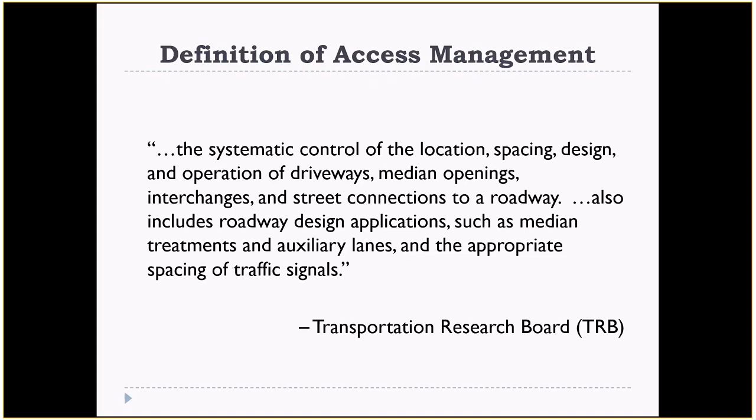We've learned a lot since the 2003 edition, with lots of experience from all over the nation. So in 2014, with a whole bunch of new research and input from different agencies, they've redefined access management as the coordinated planning, regulation, and design of access between roadways and land development. It goes on to say that it encompasses a range of methods that promote the efficient and safe movement of people and goods by reducing conflicts on the roadway system and at its interface with other modes of travel. These methods include improvements to benefit transit, pedestrians, and bicyclists, as well as different treatments for urban, suburban, and rural settings. So it's more all-encompassing than the first edition.

So it's very all-inclusive here when we are designing driveways and roadways. We now take into more consideration all road users.

So here's some examples of access management techniques. They talk about traffic signals that support signal coordination and efficient traffic progression. We're not using the traffic signals of our grandfathers, right? Traffic signals are just like the computers from 20 years ago. They can do a lot more and move traffic more efficiently. So we need to take advantage of that on our urban major arterials.

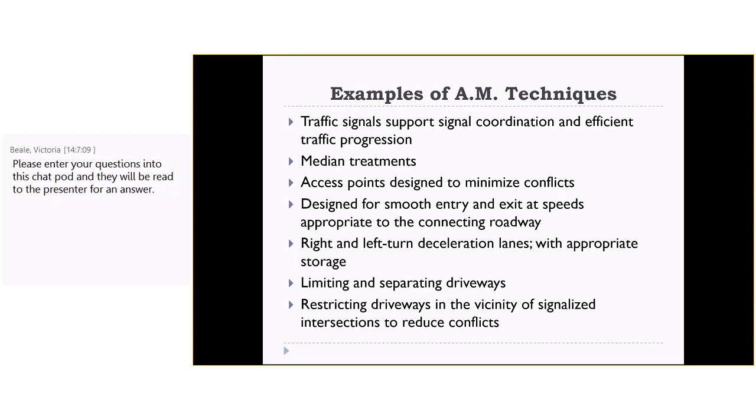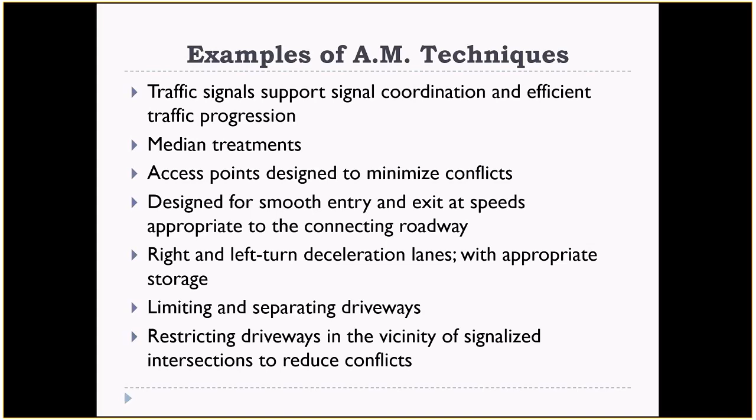We'll definitely be talking about median treatments to limit the movements allowed for driveways. We'll also talk about access points designed to minimize conflicts, designed for smooth entry and exit at speeds appropriate to the connecting roadway. And we'll talk about right and left turn deceleration lanes with appropriate storage lengths, and how we need to limit, separate, and restrict driveways in the vicinity of signalized intersections to reduce conflicts.

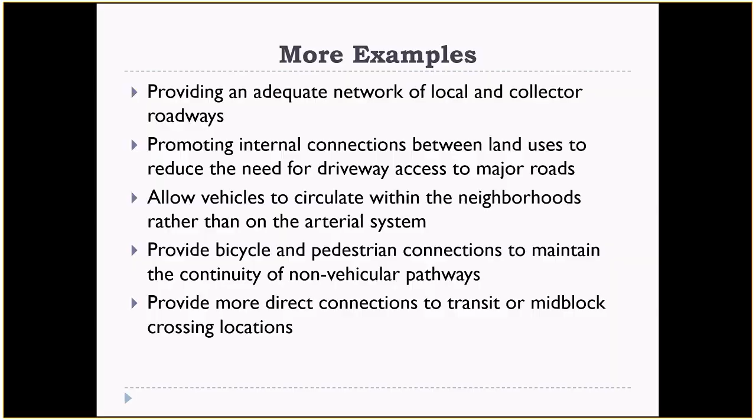Some more examples are shown here. Provide an adequate network of local and collector roadways. These roadways promote internal connections between land uses to reduce the need for driveway access to major roads, and allow vehicles to circulate within neighborhoods rather than on the arterial system. And we need to provide bicycle and pedestrian connections to maintain the continuity of non-vehicular pathways and to provide more direct connections to transit or mid-block crossing locations.

So those are some definitions and examples from the new, or second, edition of the Access Management Manual. So when you hear the definition of access management, it also brings about these questions to mind: What is the purpose of access management? Why is it important? Who benefits from it? And what happens if we don't manage our access?

So first of all, what is the purpose of access management? The main purpose is to provide vehicular access to land development in a manner that preserves the safety and efficiency of the transportation system. It applies traffic engineering principles to the location, design, and operation of access drives serving activities along the roadway, and evaluates the suitability of providing access to a given road, as well as the suitability of a site for land development.

And it addresses the basic questions of when and where access should be located, how it should be designed, and the procedures needed to administer your program. So in a broad context, access management is a resource management tool, since it is a way to anticipate and prevent safety problems and congestion. And of course, it's hard to have an access management class without these two drawings.

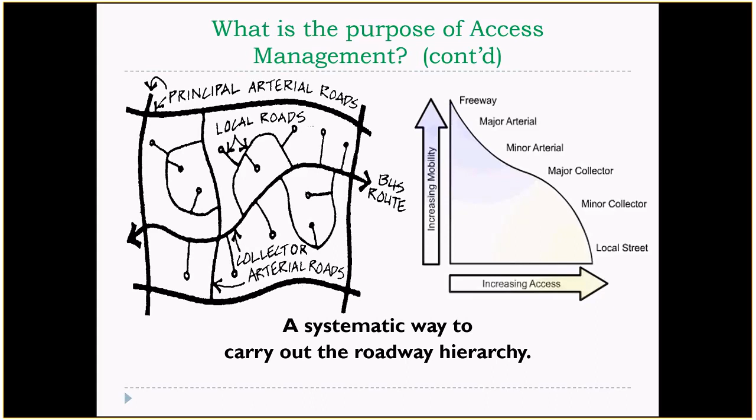So it's showing how access management is a systematic way to carry out your roadway hierarchy. From a planning perspective, access management is a systematic way to carry out the roadway functional hierarchy that is implicit in state, regional, and local transportation plans. So it's stressing the need for each jurisdiction to have their own thoroughfare plan. That's one of your basic tools to begin your access management program. Your thoroughfare plan classifies your roadways by function on the basis of the priority given to land access versus through traffic movements. So access management is particularly important along arterial roadways and other primary roads that are expected to provide safe and efficient movement of traffic, as well as access to property.

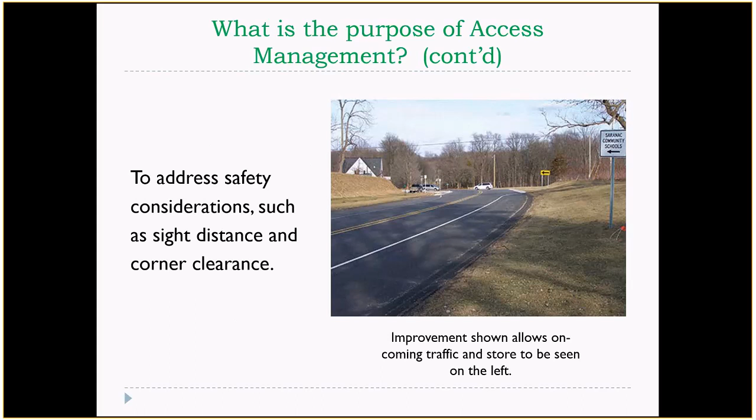Another purpose of access management is to address safety considerations. Here's a picture showing a location that used to have a sight distance issue with corner clearance, so they actually improved that roadway to take care of those concerns.

So why is access management so important? Well, without it, roadway function deteriorates more rapidly through closely spaced curb cuts and median openings, lack of turn lanes - as you see in that top picture - driveways near major intersections, and poorly coordinated traffic signals.

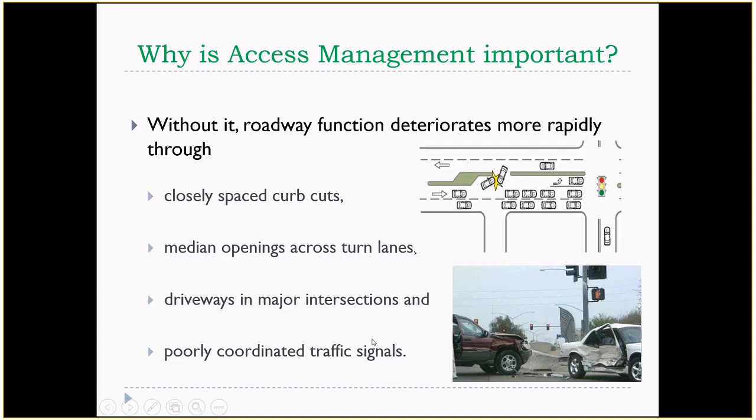Our roadways are an important public resource, and they are costly to build, improve, or replace. In our revenue-constrained environment, effective management of the transportation system is not an option - it is essential. It is simply not practical to allow major arterial roadways to deteriorate under the assumption that they will be replaced or reconstructed in the future. Yet many areas continue to do just that, by allowing closely spaced curb cuts and the other items shown there, thus creating unsafe and congested conditions on major roadways.

So government agencies can provide many benefits by managing the roadways with proper access management.

So here's a list of things that access management can provide. It can extend the functional service life of roads and highways, increase public safety, reduce traffic congestion, and improve the appearance and quality of the built environment.

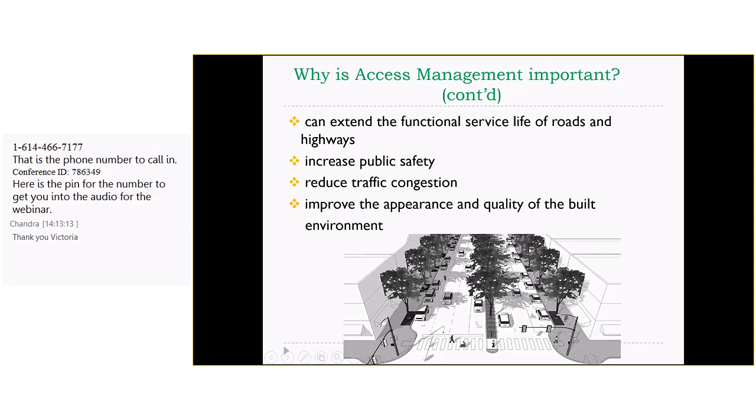Here we have a picture showing a nice, appealing urban central business district street with a few access management provisions included. It has a safe, clearly defined crosswalk for pedestrians, bicycle lanes, a tree-lined median to restrict left-turn movements, and pedestrian refuge for a mid-block crossing and a signalized intersection. You'll also notice there are no driveways.

Some other benefits: we preserve long-term property values and the economic viability of abutting development, improve fuel efficiency, and reduce vehicular emissions. We also consolidate access roads, which is less damaging to rural landscapes or environmentally sensitive areas than numerous individual private drives.

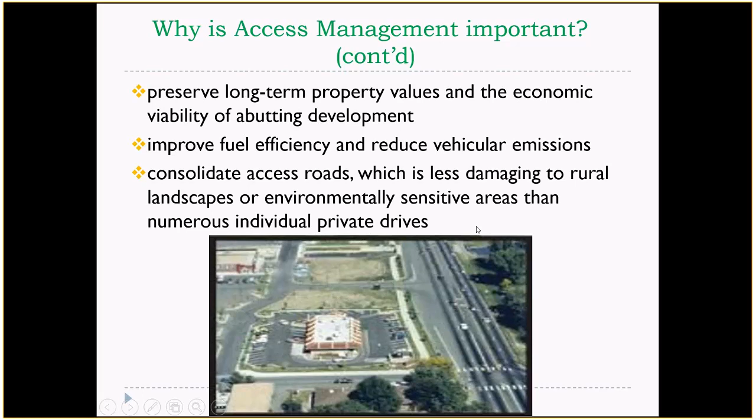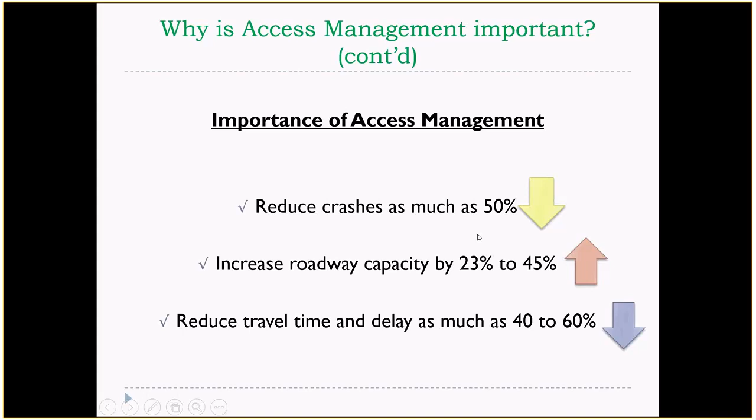The importance of access management: number one, an effective access management program can reduce crashes by as much as 50%, increase roadway capacity by 23% up to 45%, and reduce travel time and delay by as much as 40 to 60%.

So who benefits from access management? Well, all roadway users benefit. Motorists face fewer decision points and traffic conflicts, which simplifies the driving task and increases driver safety, with fewer traffic delays, and they arrive more quickly at their destinations.

Cyclists face fewer decision points and conflicts with traffic, which simplifies the cycling task and increases safety for cyclists, and they benefit from more predictable motorist travel patterns.

Pedestrians and transit riders benefit as well, because pedestrians face fewer and less frequent access points where motorists enter and exit the roadway, making it safer to walk along roadways. They can use medians as a refuge when crossing several lanes of traffic. Transit riders experience reduced delay and reduced travel times, benefit from a safer walking environment, and experience more convenient access to transit stops as connectivity of streets, sidewalks, and pedestrian ways are improved.

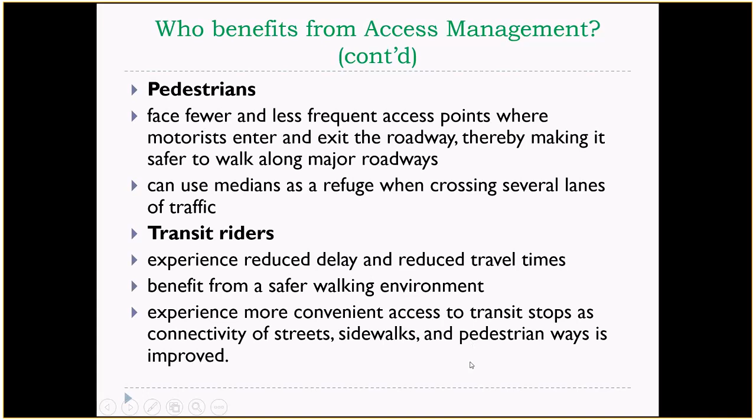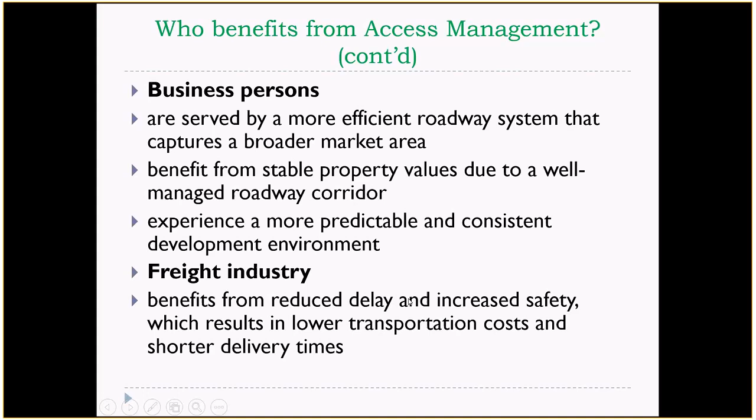Business people and the freight industry also benefit from access management. Business persons are served by a more efficient roadway system to capture a broader market area, benefit from stable property values due to a well-managed roadway corridor, and experience a more predictable and consistent development environment. The freight industry benefits from reduced delay and increased safety, resulting in lower transportation costs and shorter delivery times.

Government agencies and communities also benefit from access management. Government agencies benefit from a lower cost of delivering an efficient and safe transportation system, benefit from improved internal and intergovernmental coordination, and are more effective in accomplishing their transportation objectives.

Communities receive a safer transportation system, benefit from less need for roadway widening, which causes displacement of businesses and homes, and benefit from more attractive roadway corridors. They help protect and preserve their investment in transportation facilities, and may even reduce capital improvement costs for new or reconstructed roadways.

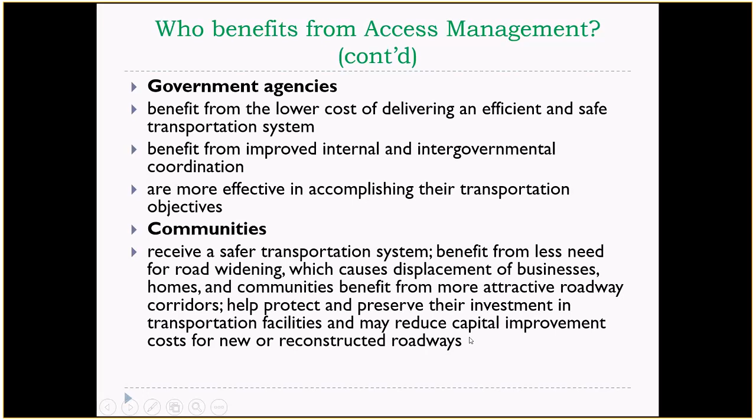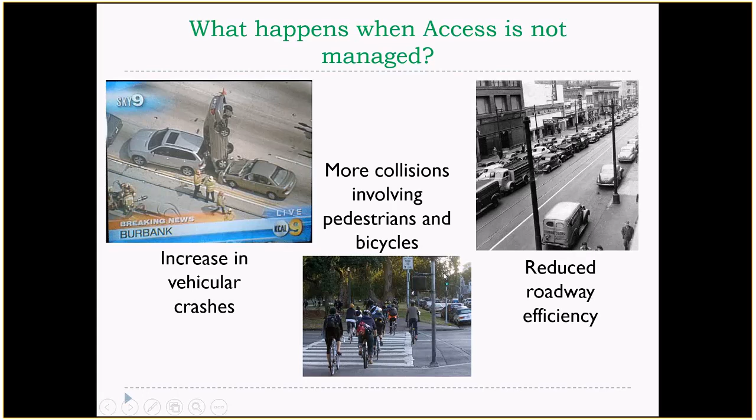So what happens if we do not manage our access? As you can see in these pictures, you get an increase in vehicular crashes, more collisions involving pedestrians and bicycles, and reduced roadway efficiency.

We might have unsightly commercial strip development, where each little development has its own direct access to the major arterial, with a lot of signage, making it unsightly. We also experience a degradation of scenic landscapes.

With major corridors becoming more congested, that generates more cut-through traffic in residential areas. Over time, these closely spaced and poorly designed driveways make it more difficult for customers to enter and exit businesses safely, and access to corner businesses may be blocked by queuing traffic.

Newer businesses seek out locations that are more attractive and have fewer access and congestion problems. Customers begin to patronize businesses with safer, more convenient access, and avoid businesses in areas of poor access design. Gradually, the older developed areas begin to deteriorate because of access and aesthetic problems, and investment moves to newer, better managed corridors.

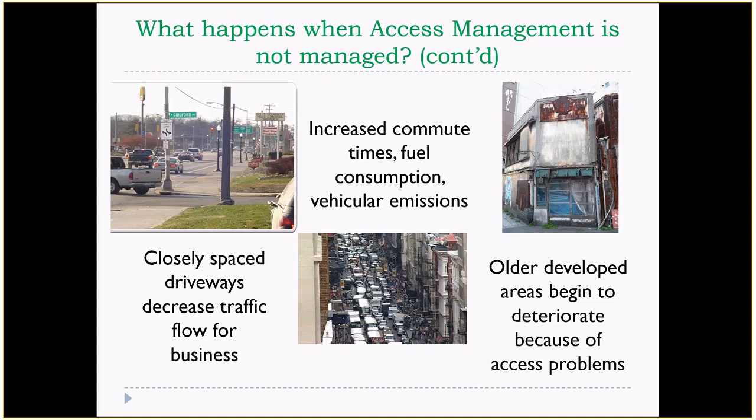Gradually, the older developed areas deteriorate because of access and aesthetic problems, and investment moves to newer, better managed corridors. These problems are symptoms of inadequate coordination of transportation and land use decisions. The resulting chain of events is a cycle of functional obsolescence along our major roadway corridors, which is what we call the transportation and land use cycle.

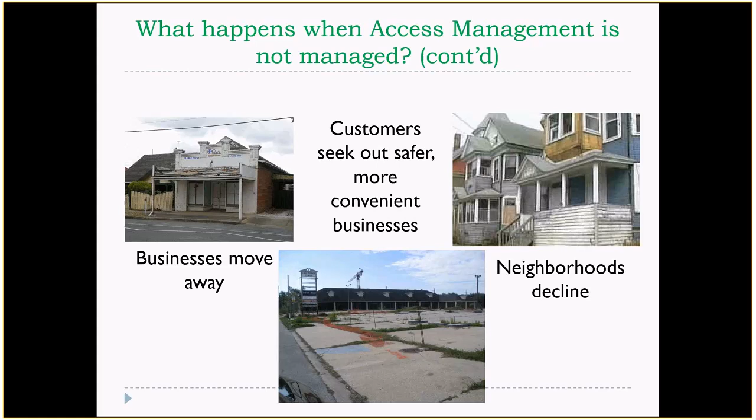So the transportation land use cycle, that is what we're trying to put an end to. With access management, that is our biggest weapon against this transportation land use cycle. So let's talk about this cycle. But first, we'll talk about the 4 keys to good transportation.

Take a look at this drawing. It shows a piece of ground that would not have any access until the new road is built, and that is how you would get access to that property. So we define access as the ability to obtain ingress and egress between a parcel of land and the highway system. Basically, how to get to and from your property via a public road.

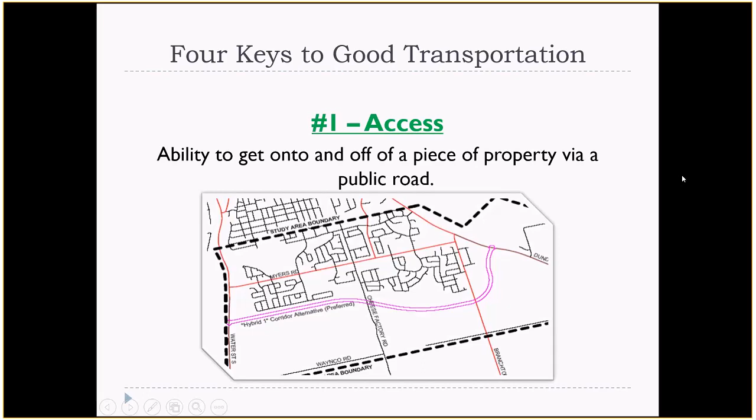And then we have accessibility. Accessibility is an area-wide measure of the ease of travel between locations within a defined area, such as a city, state, or region of the country. It is the ability to reach a given location from numerous other locations or areas. The accessibility to potential customers is of great interest to a retail establishment. Accessibility is also the ability to reach a variety of other locations from a given location. Accessibility can be quantitatively defined and measured.

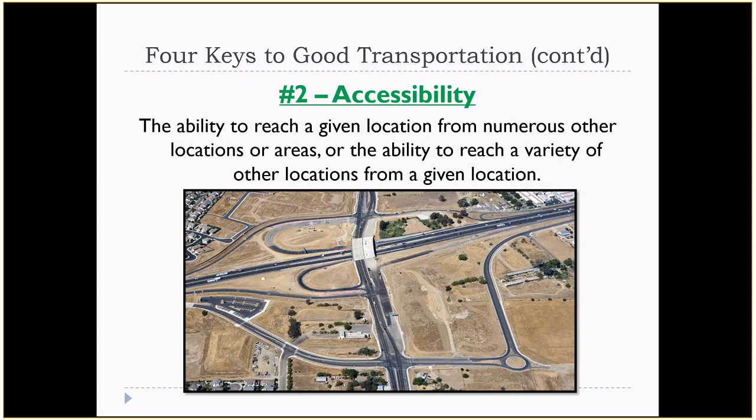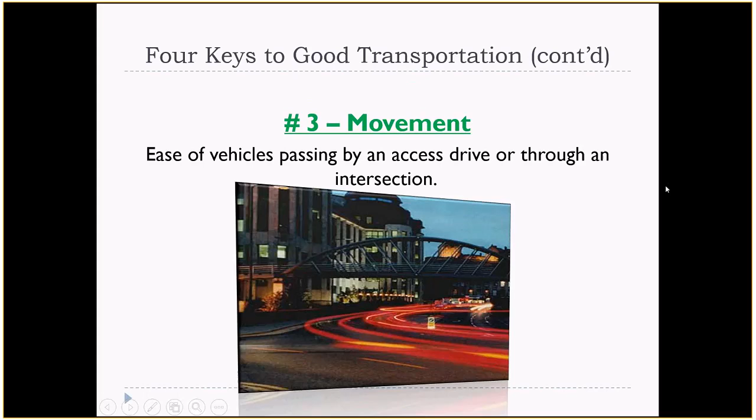Our next key to good transportation is movement. Movement is the ability to traverse a segment of highway. As used in access management, it concerns the degree of ease or difficulty of vehicles passing by an access drive or through an intersection.

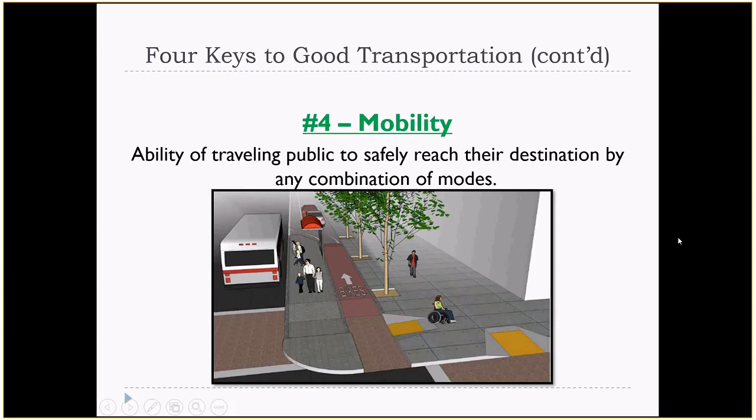And finally, our last key is mobility. Mobility relates to the ability of persons to make trips to satisfy their needs and desires by walking, or by auto, transit, bicycle, or any other combination of modes.

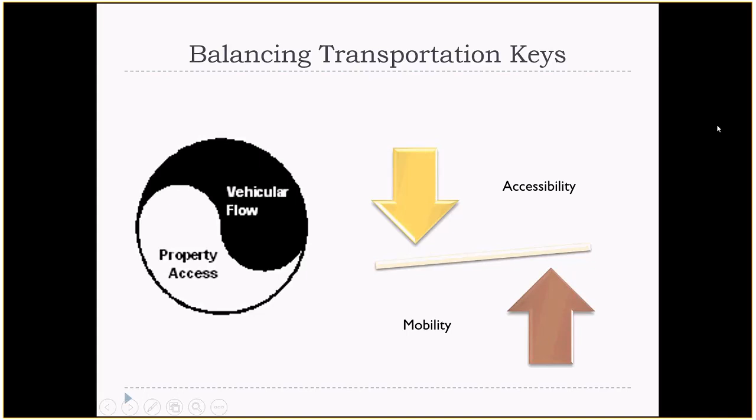With access management for roadways that carry a lot of traffic, and that are also supposed to provide access to private properties, we need a good balance between accessibility and mobility, and vehicular flow and property access.

Here's some keys to balancing transportation. First, it's important to note that an individual parcel of land or business can have good access but poor accessibility, poor access but good accessibility, good access and good accessibility, or poor access and poor accessibility. All highways or roadways provide both movement and access.

However, the two are in conflict. A high level of access results in poor movement, and high quality of movement cannot be obtained with a high level of access. Therefore, the degree to which both access and movement is provided on a given highway must be carefully managed so as to obtain the desired highway service and maintain traffic safety.

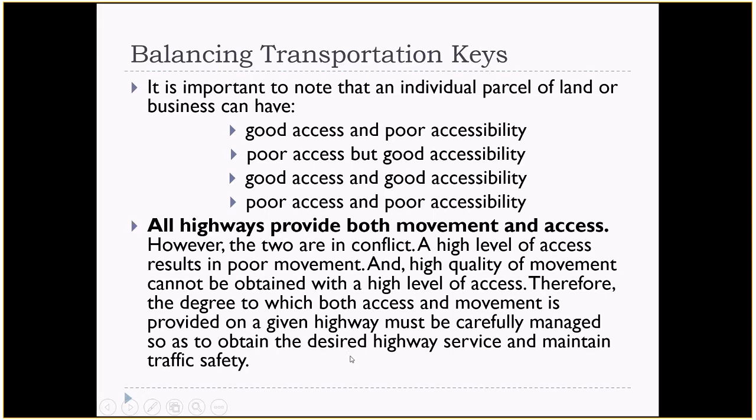So without good land use planning and access management, then we have a deterioration in the quality of traffic movement and also a deterioration of traffic safety.

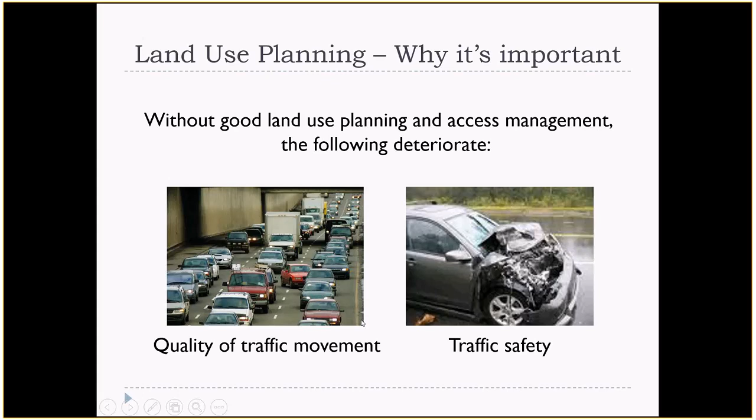And in the absence of good land use planning and access management, traffic safety and the quality of traffic movement deteriorates. And then the need to decrease vehicular crashes and restore capacity requires improvements to the roadway system.

Reconstruction to increase the level of service of an existing arterial is generally very costly and disruptive to both the public and the abutting businesses. Furthermore, the improvement in the level of service is often temporary because the improved service stimulates increased business activity.

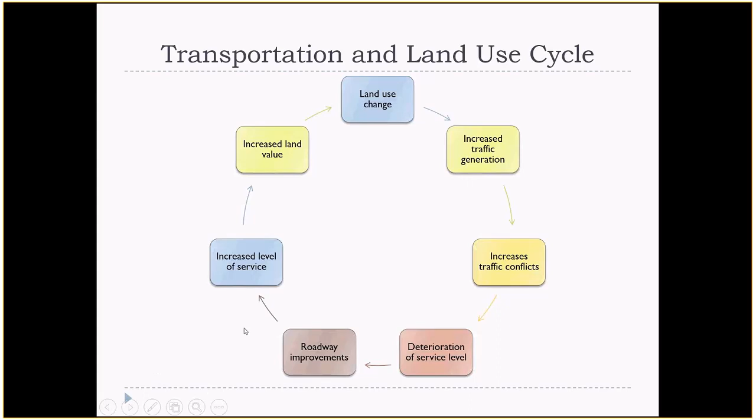In the more severe cases, the arterial must be relocated due to functional obsolescence, and the process starts all over again on a new location. So that's what we're trying to avoid with our access management tools.

Okay, so let's move on. There's some conflicts that arise that we'll jump into here real quick.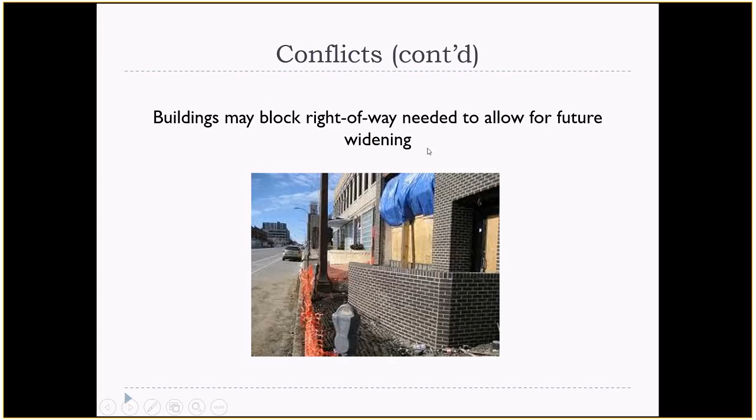But sometimes you have buildings that can block the right-of-way needed to allow for future widening. Let's take for instance Fifth Avenue in Columbus. We call that a major arterial. However, we actually call it a 4-2D arterial, meaning divided, but there are certain sections of Fifth Avenue that we can never widen enough to build that way, because the buildings are right up on the narrow right-of-way lines.

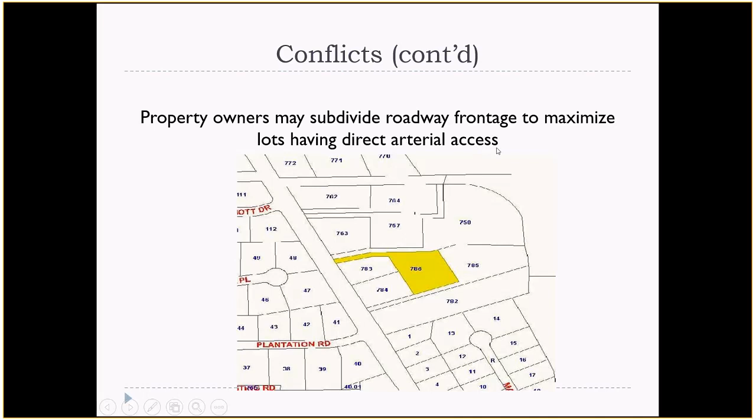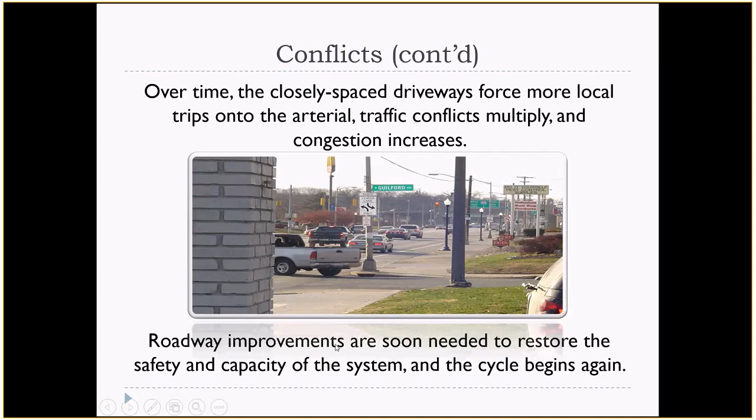Here's a picture of West Broad Street, just down the road here from ODOT. Over time, the closely spaced driveways force more local trips onto the arterial, and traffic conflicts multiply and congestion increases. So roadway improvements are soon needed to restore the safety and capacity of the system, and the cycle begins again.

So there's the basics of access management, what it is and what problems we face if we don't have access management. So now let's move on and talk about how we can manage an access management program.

Some of the ways we do that are with policies, directives, and guidelines. State and local agencies may adopt specific policies, directives, or guidelines directly or indirectly related to access management. A local government typically sets forth public policies in its comprehensive plan. State agencies like ODOT may establish formal agency policies, procedures, and directives under their general administrative functions. Access management issues are sometimes addressed through guidelines which do not require specific legislative authority, but which lack the mandatory status and enforceability of regulations.

So then we have access management regulations. These regulations may address various aspects of access management, such as the location and spacing of driveways, the design of driveways, spacing of median openings, spacing of traffic signals, joint and cross access requirements, interchange areas, and access permitting. These regulations may take the form of comprehensive statewide access codes or local access management ordinances, and they can be more effectively enforced than guidelines. So that's a step up from the guidelines.

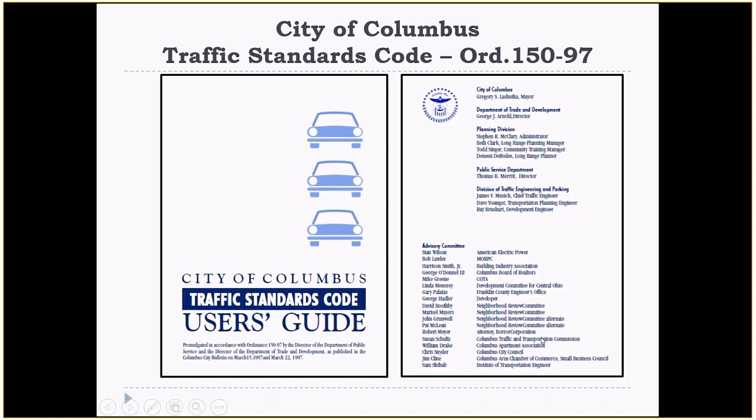We had people there from all departments of the city, and people from all around I-270 from the different suburbs, and within the City of Columbus, different neighborhoods. We had developers, COTA, people from the building industry, even AEP, and so on and so forth. Lots of people met many times to get that together.

Here's the basic parts of the traffic standards code. It calls for comprehensive planning focused on the variety of transportation options available to Columbus residents and visitors, including walking, bicycling, driving, and using public transportation. A specific Columbus Comprehensive Plan goal was to provide Columbus with a balanced, coordinated transportation system which enables individuals and goods to move safely, efficiently, and affordably.

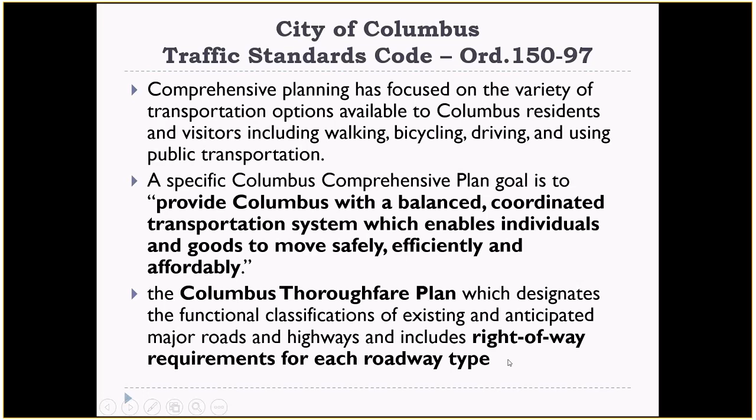The Columbus Thoroughfare Plan, approved in 1993, designated the functional classifications of existing and anticipated major roads and highways, and included the right-of-way requirements for each roadway type. This traffic standards code codified traffic standards to further ensure that roadways meet the transportation demands generated by new and expanded development.

So there's the requirement of traffic impact studies in association with major developments. This city ordinance allowed us to require traffic impact studies before we would review and approve any rezonings, zoning variances, special permits, and preliminary subdivision plats. These requirements are based on the traffic generated by the subject development as a proportion of total traffic.

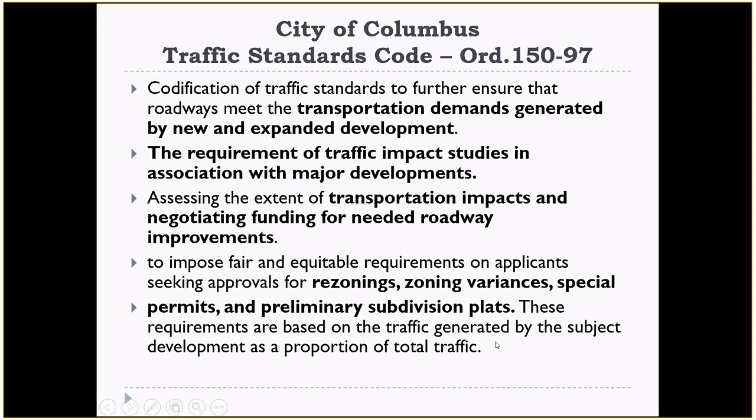There's more in it, but that was the basic part of how it dealt with access management. It allowed us to work with developers and actually get them to pay their fair share for roadway improvements.

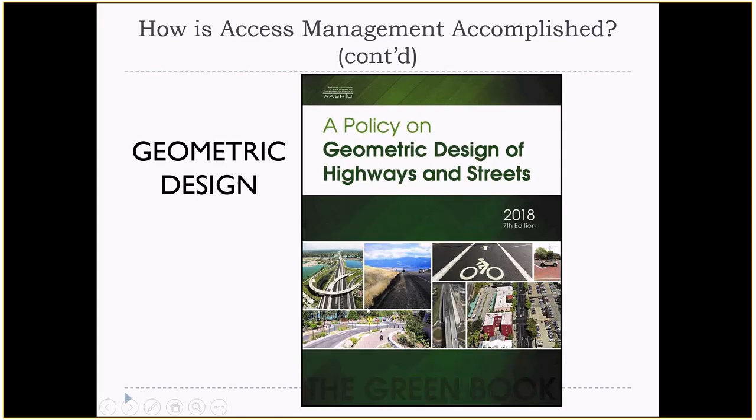Here's another resource that you're going to need, and that is the latest AASHTO Green Book. The 2018 edition is the latest edition. It contains the current design, research, and practices for highway and street geometric design. It presents an updated framework for geometric design that is more flexible, multimodal, and performance-based than in the past, and it provides guidance to engineers and designers who strive to make unique design solutions that meet the needs of all highway and street users on a project-by-project basis.

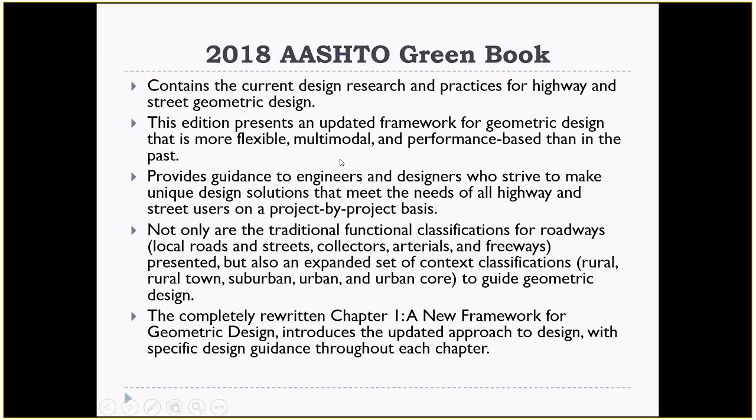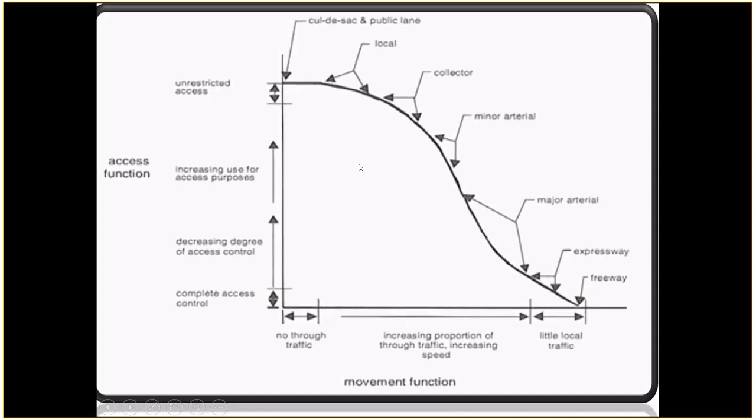So it's important that when you approve a driveway, you're approving not just the location, but the design, and you need this latest manual to get that done. Also included in the Green Book is how you can classify your roadways into a logical hierarchy, from freeways all the way down to a local roadway or even a cul-de-sac. It's important that you have that book, or somebody does, at your agency.

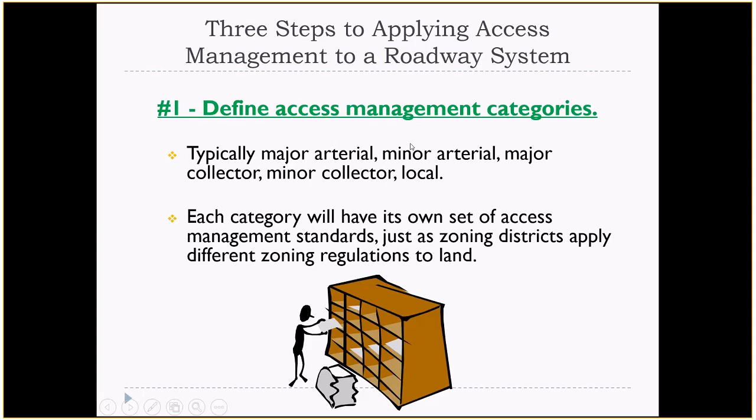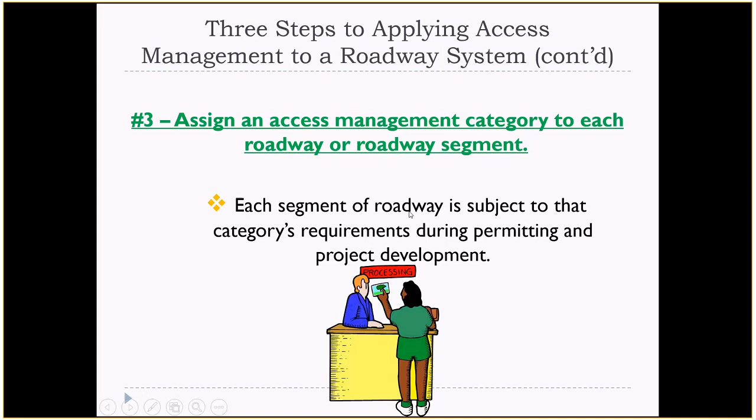There are 3 steps to applying access management to a roadway system. The first step is to define your access management categories, which is why you need your thoroughfare plan. The second step is to establish appropriate access management standards for each category, and those standards decrease in restrictiveness for the lower categories. The third step is to assign an access management category to each roadway or roadway segment, so each segment is subject to that category's requirements during permitting and project development.

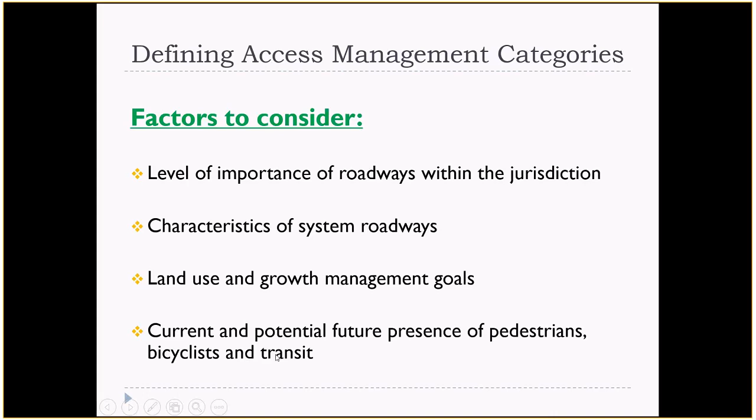Okay, so I wanted to move on there. After we talked about the management of your program, let's now move down to slide 140.

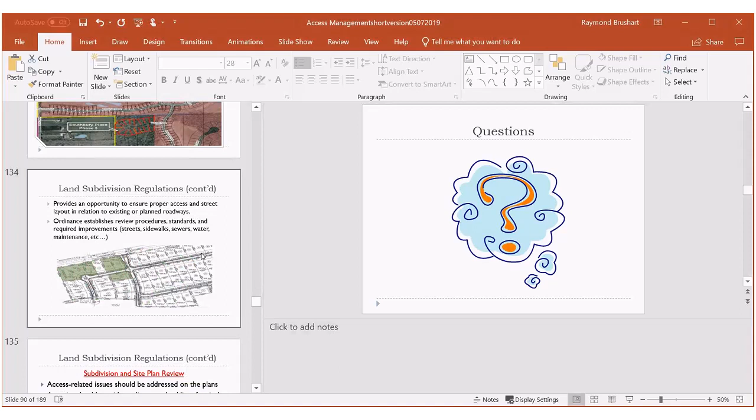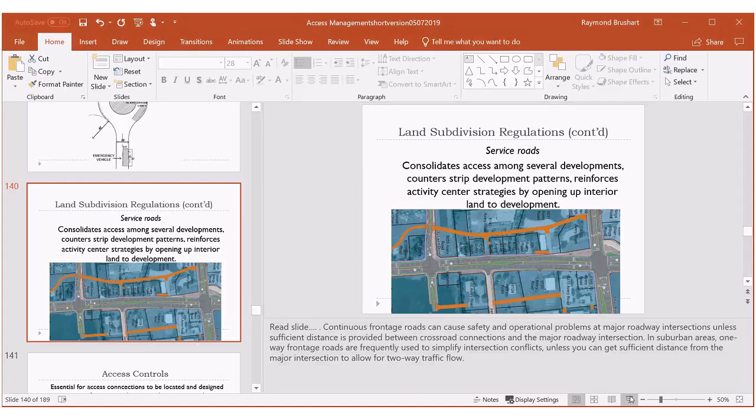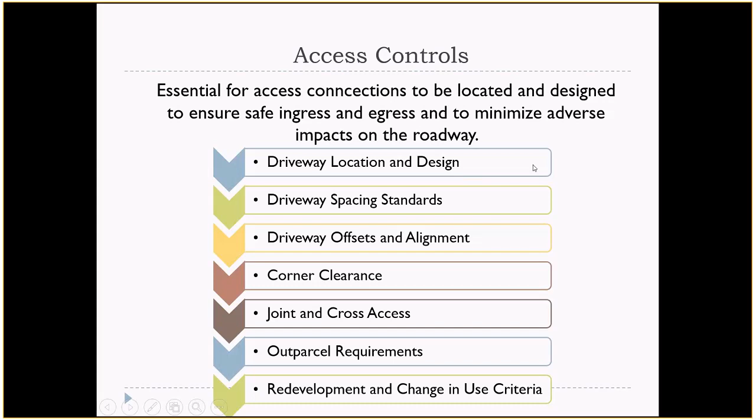Access controls are essential for your driveways to be located and designed to ensure safe ingress and egress and to minimize adverse impacts on the roadway. Here's a list: driveway location and design, driveway spacing standards, driveway offsets and alignment, corner clearance, joint and cross access easement agreements, outparcel requirements, and redevelopment and change in use criteria on your older roadways and corridors.

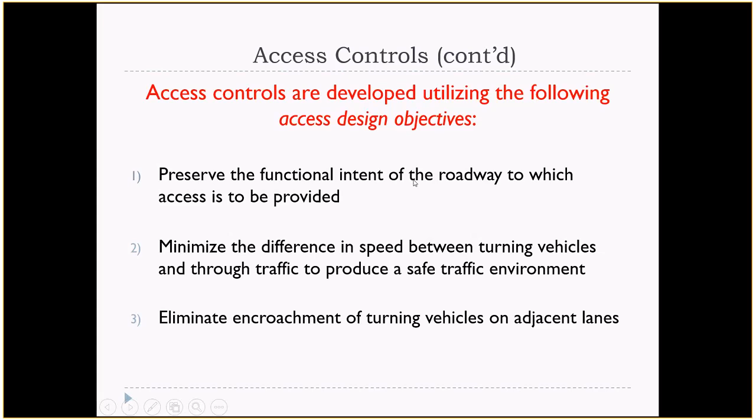Access controls are developed utilizing the following access design objectives. Number one is to preserve the functional intent of the roadway and minimize the difference in speed between turning vehicles and through traffic to produce a safe traffic environment, and to avoid or eliminate encroachment of turning vehicles on adjacent lanes. You use a combination of throat width and return radii that will accommodate the intended exit and entry operations of the selected design vehicle, provide adequate sight distance for drivers exiting the site, and provide sufficient storage within the driveway for traffic entering the site to prevent spillback onto the abutting road.

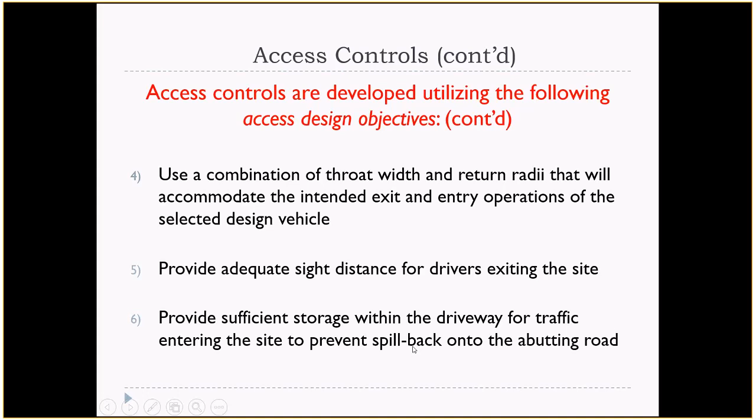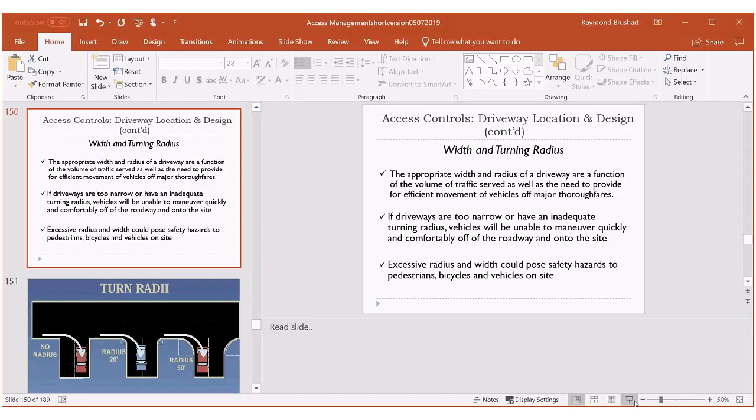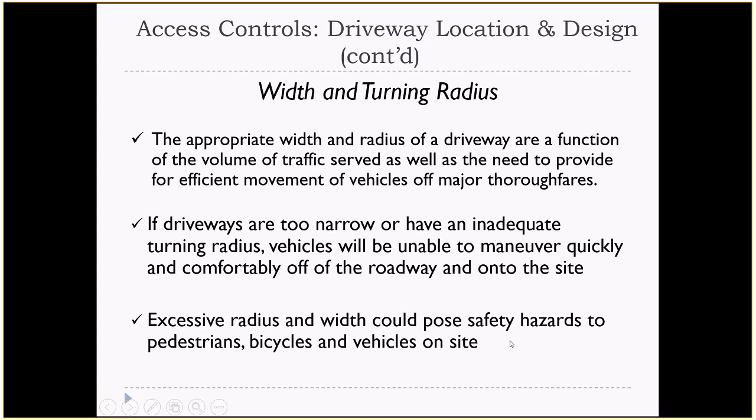Let's take a look at what this does for us from a roadway safety perspective. We talk about the width and turning radius of a driveway. They are a function of volume served, as well as the need to provide for efficient movement of vehicles off major thoroughfares. If driveways are too narrow or have an inadequate turning radius, vehicles will be unable to maneuver quickly and comfortably off the roadway and onto the site. Excessive radius and width could pose safety hazards to pedestrians, bicycles, and vehicles on site.

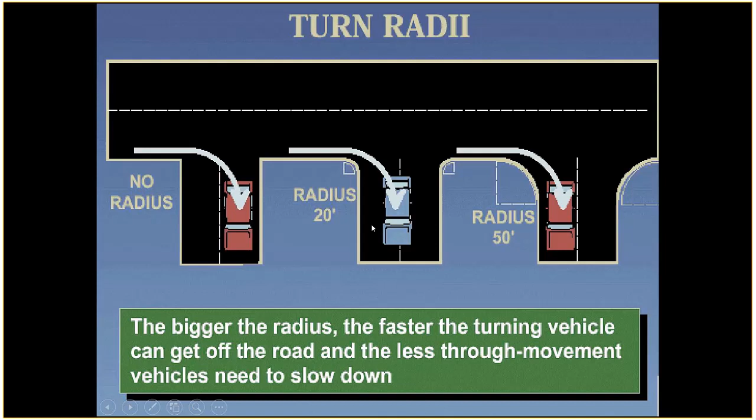Here's a drawing that shows how the size of a radius affects the incoming right-turning vehicle. You don't want them to encroach on the exiting lane. Sometimes you have to have a radius, or even a combination of radius and flares or tapers.

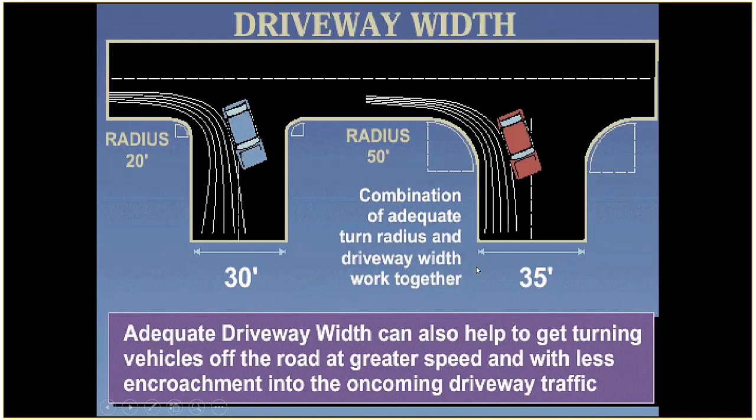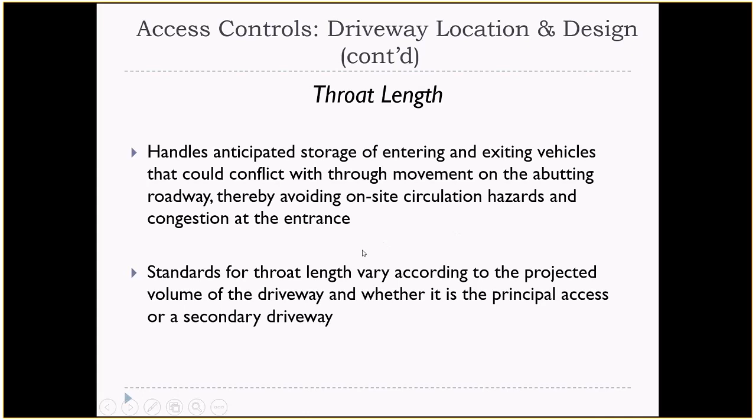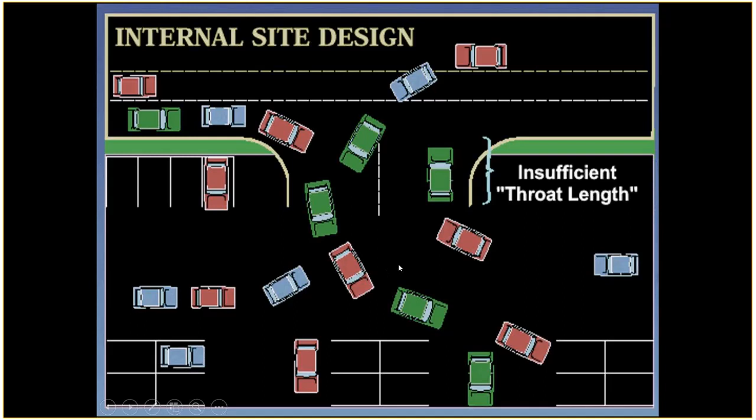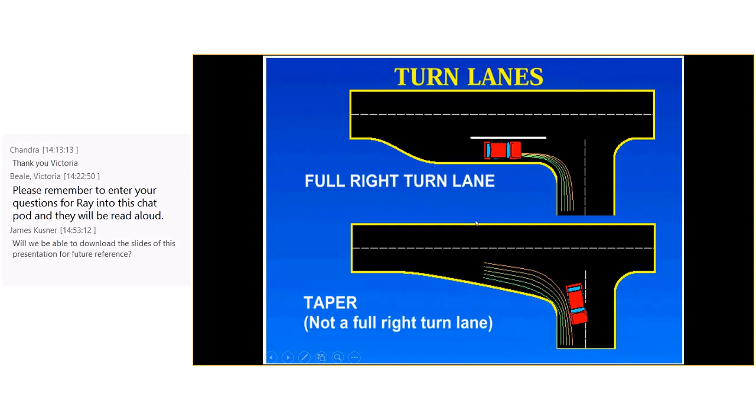Then we have turn lanes that allow drivers to decelerate gradually out of the through lane and wait in a protected area for an opportunity to complete their turn. Here's a picture showing a full right turn lane versus just adding a taper. As you can see, the right turn lane provides more storage and gets the vehicle all the way out of the way of the through lane.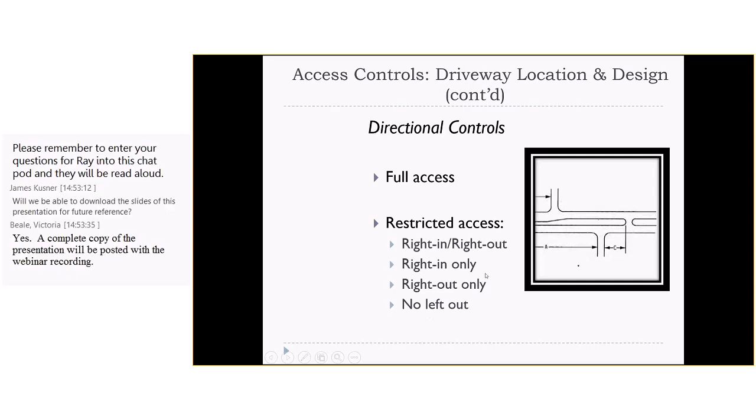Then you have directional controls on your driveways. You have a full access driveway that allows all movements, left in and left out, but then you have restricted access driveways that allow right in, right out, right in only, right out only, or no left out.

Here's a resource that helps you, the guide for the geometric design of driveways from the NCHRP. That's another good resource, Report 659.

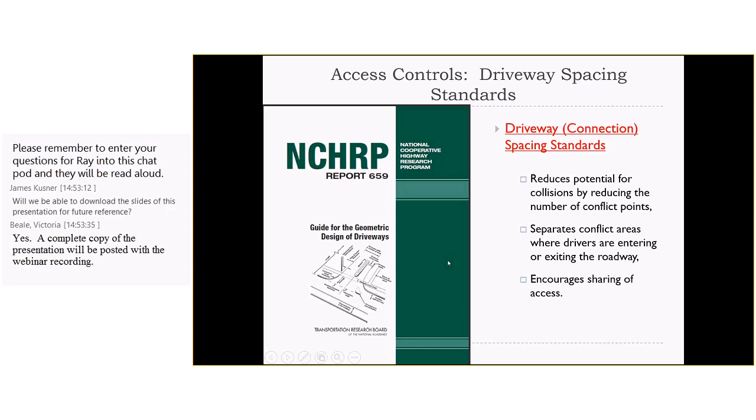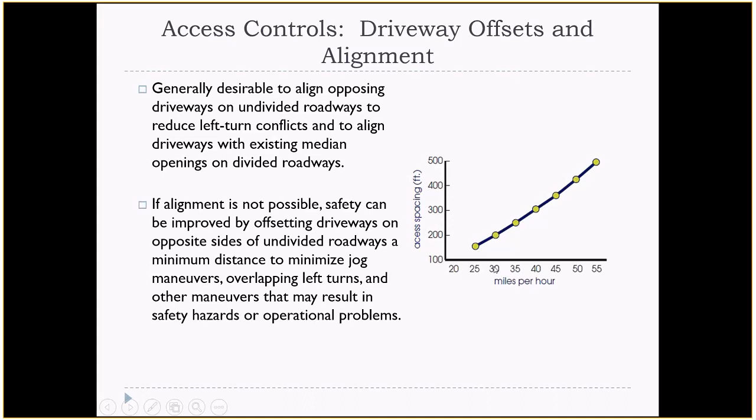Another one is driveway offsets and alignment. It's generally desirable to align opposing driveways on undivided roadways to reduce left turn conflicts. If alignment isn't possible, safety can be improved by offsetting the driveways. This table helps you come up with good access spacing based on the speed of the roadway.

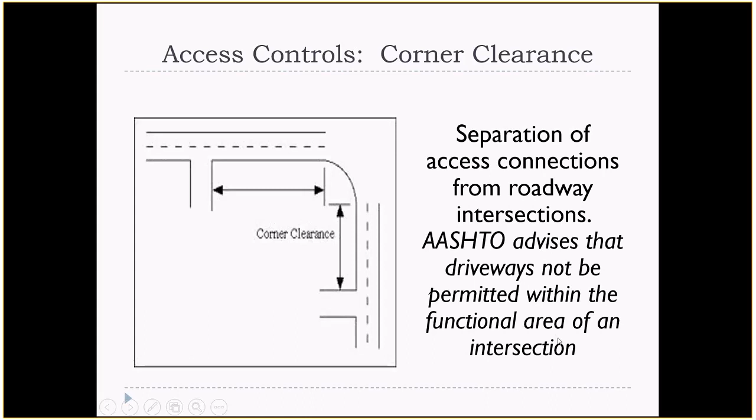Joint and cross access of properties improves roadway safety by reducing conflict points and separating conflict areas, and promotes development of a system of joint use driveways and cross-access easements that allow traffic to circulate from one site to another without re-entering the abutting roadway.